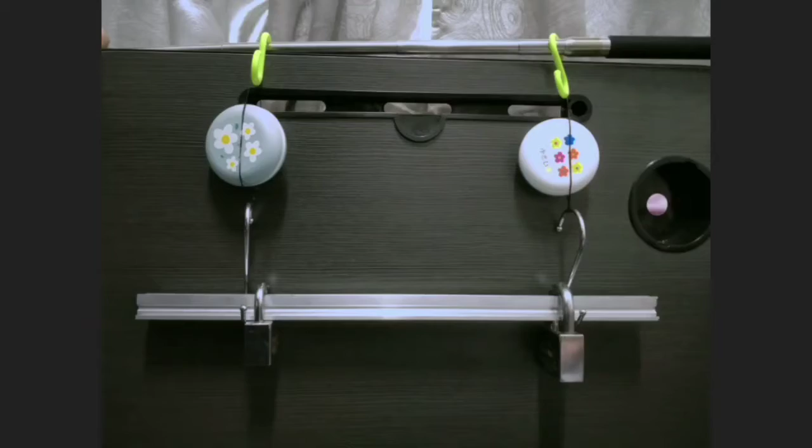Loosen the screw of the rider and install it on the test specimen. Move the rider of weight to the distance of 100mm from support A. Reset the weight scale value to 0. Put the weight of 15 N on the weight hanger and hang it up at the rider of weight.

Read the weight scale reading for both supports and record it in table 1. Repeat steps 2 to 8 for the different distance X.

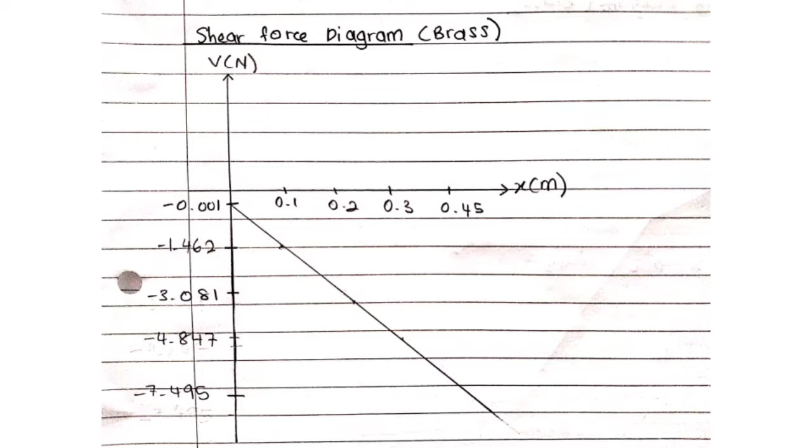For the reaction force, there is not much difference between the standard value and the calculation for each test specimen. The error is less than 10% but still not accurate enough. Possible errors are maybe because the apparatus on the horizontal surface is not balanced enough, and the observation and calculation using the wrong method.

Bending can induce both a normal stress and transverse shear stress. Applying the load to the free end of the beams will cause them to bend and slide past each other. The position of the beam will change its bending and shear stress.

Yes, steel is stronger than brass because brass is easy to form into various shapes. So brass also can easily be bent through the experiment. Yes, there is a difference. The top of the beam will compress while the bottom is in tension. At the transition between the compressed and tensile region, the stress becomes zero, which is the neutral axis of the beam.

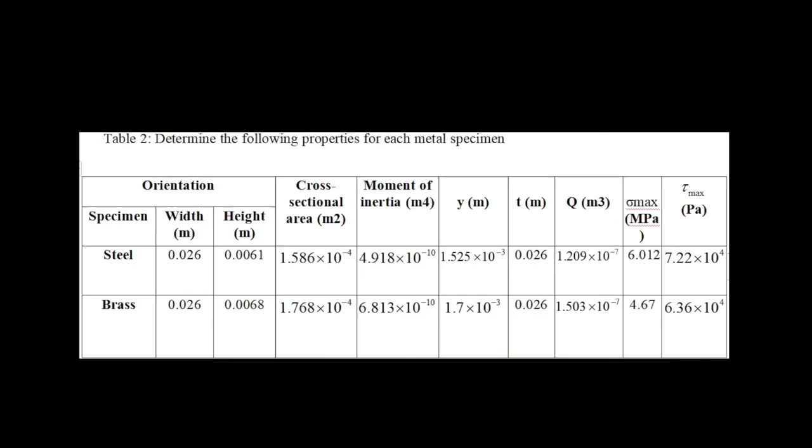The reaction force for both specimens is the same, while the shear force and the bending moment are different. The shear force for the steel bar is larger than the shear force for the brass bar. Meanwhile, the bending moment of the brass bar is larger than the bending moment for the steel bar.

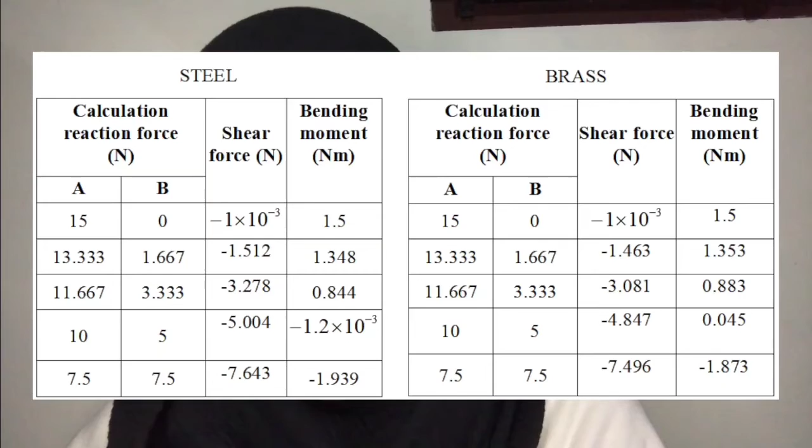The possible sources of errors are systematic errors, occurring during reading the value from the dynamometer, vernier caliper, and steel ruler, or putting the suspender too tight. When the load is located near the edge of the specimen, the bending and shearing stress will be more difficult to find because it will need more force. When the load is located in the middle of the specimen, it will be easier to find the bending and shearing stress because less force needs to be applied.

Yes, steel will be stronger than brass because, based on the results, the maximum bending and shear stress values of the steel are higher than brass. If the values for both stresses are high, that means steel needs a lot of force to be applied to get a result on the bending of the steel.

No, there will be no difference because the bottom area of the specimen and the top area of the specimen will be the same. When the force is acting on the top of the beam, it will have the same stress value as when the force is acting on the bottom of the beam. These are the classification of beams: simply supported beam, continuous beam, overhanging beam, beam fixed at one end and simply supported at the other end, cantilever beam, fixed beam.